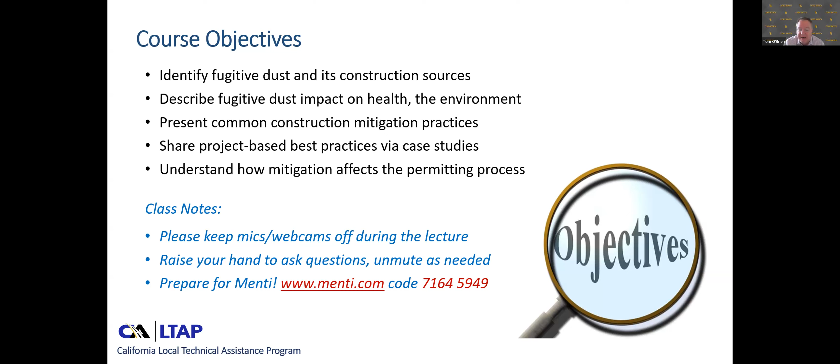But as I said, we hope to build upon this topic in the development of a certificate-based program that looks at a whole host of topics surrounding sustainable construction management and engineering practices. And Hamid Rahai, who is a professor and director of the Center for Energy and Environmental Research and Services here at Cal State Long Beach, is the designer of the program, and he's going to tell you more about how this topic fits into that in a minute.

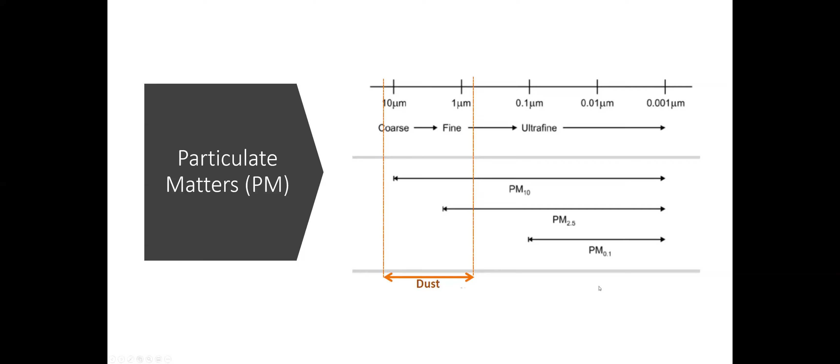Hamid, sorry to interrupt for just a second. Sure. You want to share your screen and show your presentation? My screen is not shared? That's correct. Okay, let me go back, I'm so sorry, I thought I was. Let me share my screen. I am. Can you see it now? There it go. Yes, go to presentation mode. Yeah, okay. Can you see it now? Yes, you might want to back up one, and then we can, there you go. Yeah, alright, sorry about that. I thought I had changed the slides from the old one to the new one.

Anyway, so I talk about construction phases and emissions, and these are generally the different phases of construction. As I said, you could have one or two or all of these phases in construction that include demolition, site preparation, grading, trenching, building, paving, and architectural coating.

And we have emissions associated with these construction phases. Emissions could come from the diesel equipment we're running, including off-road equipment, on-road equipment, or paving, or it could be from fugitive dust or architectural coating. So today we are focusing on fugitive dust.

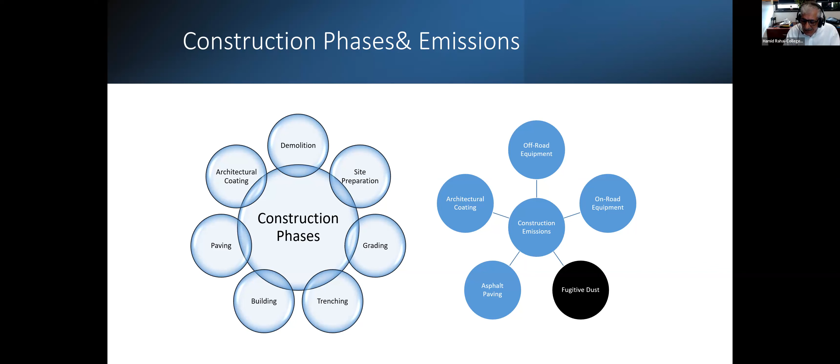So what is dust? Dust is particulate matter, airborne due to construction activities. These particulates are different from the exhaust PM coming from diesel engines. They are generally larger, estimated as 15 micron particulate, or PM15. But when we do analysis, because of the way we formulate PM based on PM10 and PM2.5, we have emission factors we use to convert the PM15 to PM10 and/or PM2.5. I'll explain this a bit more when we get to how we do calculations in construction projects, in calculating the total PM emitted into the atmosphere.

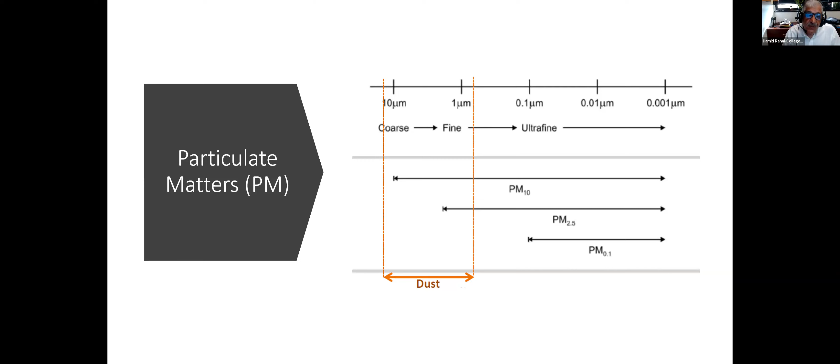Respiratory illness including COPD, asthma, and cancer is part of the health impact of dust or fugitive dust. Scarring of the lung can cause permanent damage to lung tissue and thus limit oxygen exchange, causing shortness of breath and fatigue. Swallowing dust and persistent exposure to dust could result in stomach, intestine, and esophagus cancers.

So the important thing about this part is the insistence on having all construction workers wear masks. We got used to masks during the pandemic, so it's a good thing. Mask is definitely a major way to prevent or minimize the impact of fugitive dust or particulates on human health.

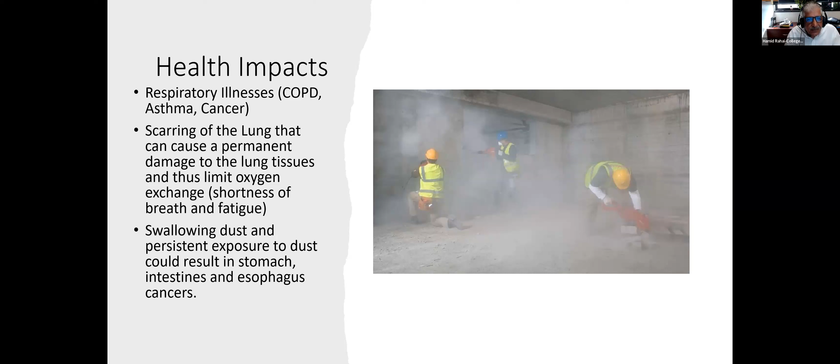So then the question is how do we calculate this fugitive dust? I mentioned that any kind of program offered by AQMD, federal, or state agencies is based on a certain baseline model that they use to calculate the total particles emitted into the atmosphere.

To do this, they look at a significant amount of data, the trend of this data, and do a statistical analysis. Based on that, they come up with formulas to do the estimate - basically looking at the trend of dust measurements and field testing from many projects, and coming up with an estimate of how much dust is emitted into the atmosphere from these operations.

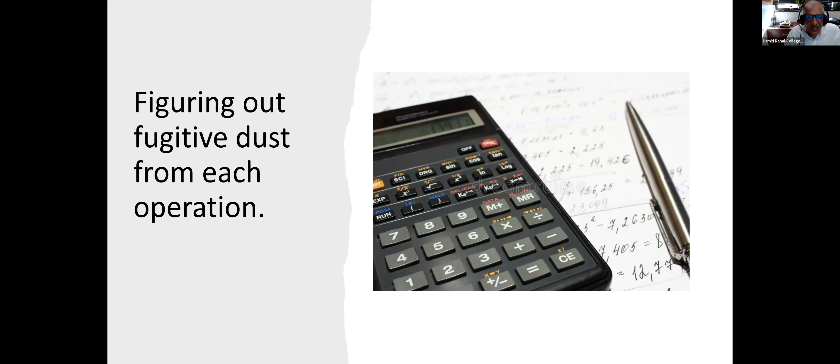When we talk about grading, if EF is the emission factor in pounds per VMT, and VMT is vehicle miles traveled, then total PM emitted is the emission factor times VMT. But the question is how do we calculate VMT for a project, and then what would be the emission factors?

For grading equipment, the equations are given here for PM15, PM10, TSP, and PM2.5. These are not complicated mathematical equations, but again we're not emphasizing mathematics here, rather emphasizing where these come from. All these correlations come from field experiments and compiling data from many different projects, coming up with an estimate of those.

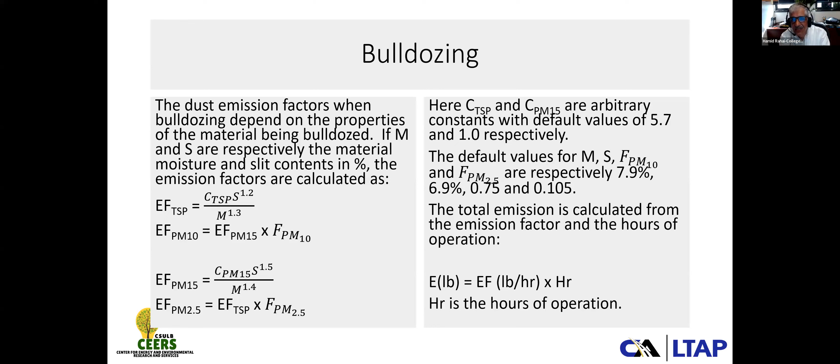Each tab related to each operation in the spreadsheet contains these values, but you have the ability to change those in case yours is different, because we do soil analysis when we do any kind of construction projects. A lot of time we do soil analysis, and when we do, some of the values could be different, so you can put in the real value to estimate those.

Truck loading and dumping and loading cause fugitive dust emission. We will talk about the mitigation process when we get to mitigation practices, but in general the emission factor depends on wind velocity and material moisture.

So you will see that one of the ways we control fugitive dust is by watering the sites. We have a sprinkler or spray water on top of the piles or areas where we're doing construction, to prevent airborne fugitive dust. So material moisture is something included in how much fugitive dust is emitted into the atmosphere.

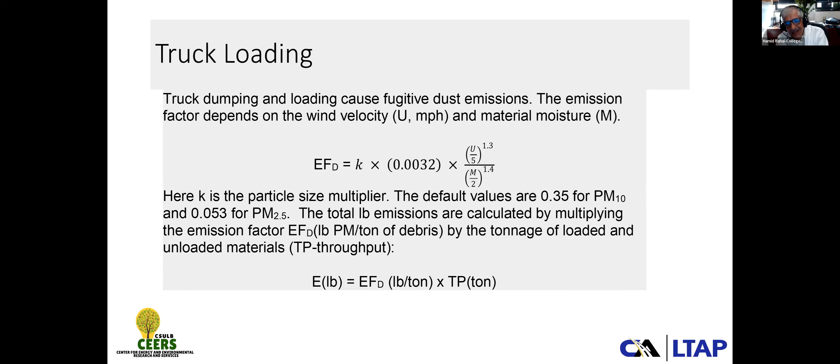Again, there is the emission factor that you need to calculate, which depends on wind velocity and material moisture. The default values for PM10 and PM2.5 are 0.35 and 0.053. But in general, we need to calculate pounds per ton of dust generated because of wind, then multiply by the total tons removed, and that gives you the amount of particulate emitted into the atmosphere.

When we talk about demolitions, there are three main operations that result in increased PM concentration: mechanical and explosive dismemberment, on-site removal of the debris, and on-site truck traffic on paved and unpaved roads. So these activities are part of demolitions.

When we talk about mechanical and explosive dismemberment, the same equation as truck loading is used, with the emission factor for PM10 about 0.0011 pound per ton of debris, and 0.00017 pound per ton of debris for PM2.5.

The input to the program for U, just remember, is in meters per second. I mentioned this also in the spreadsheet, and the M, the default value for moisture, is 2%. If there is more than 2%, then you need to change that.

So the total emissions in pounds of PM is calculated by emission factor times the tonnage of the building waste, that is the W, the tonnage of building waste. If W is unknown, there is a way to estimate that - look at the square footage of the building and multiply by 0.046 ton per square foot, and that gives you an estimate of how much waste you are removing in terms of tonnage from this building.

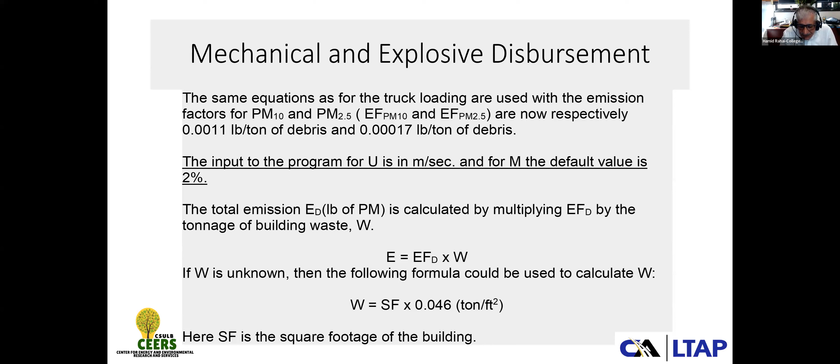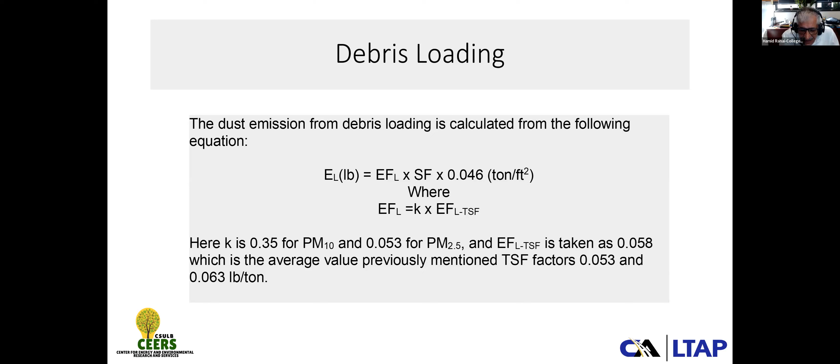Debris loading dust emission is calculated from this equation. It includes square footage, and 0.046 is a factor in tons per square footage times the emission factors, and K is a multiplier used here for PM10. If you're looking at PM2.5, these values are different. The emission factor is taken as 0.058, which is the average value previously mentioned. There are two emission factors we had before, and you take the average of that value for the debris loading here.

When we talk about on-site traffic from paved and unpaved roads, obviously fugitive dust is associated with these activities. For paved road on the left-hand side, you can see the equations. This is a little bit more complicated, but it depends on the number of wet days that we have at least 0.01 inch precipitation.

N is the number of days, so if you're looking at the total particulate in a month of activity, the number of days is 30. If you're looking at annual, it's 365. If you're looking at seasonal, it's 91 days. And W is the average weight of the vehicle, generally taken as 2.4 tons.

It could be different if you're using different kinds of vehicles, so that can be changed in the spreadsheet to do the right calculations. Generally, the K factor is a particle size multiplier. SL is road surface silt loading, so you can calculate when we have a paved road how much PM is emitted. For unpaved road, the equation changes and includes mean speed of the vehicle and material moisture content. It's saying material silt content in terms of percentage. VMT, vehicle miles traveled, is included here. Inputting these values into these equations for unpaved road gives you the emission factor. Once you have the emission factor, you can multiply that by VMT.

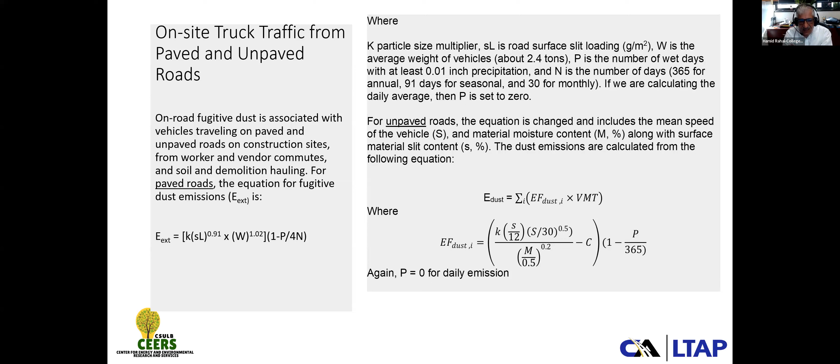I have a summation here that includes multiple activities. Depending on the site, if it has variations in terms of the material and moisture and so on, and different vehicles in different areas, you need to calculate them individually and then add them up to get total PM emitted into the atmosphere. So that is generally an overview of the PM generated.

I would like to bring up the spreadsheet, but before I do, I want to know if there's any question. Anybody has any question? No? Okay, so let's get going.

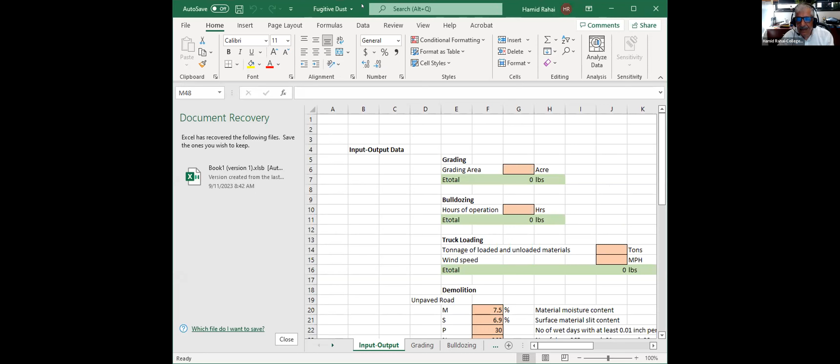So here I have input-output data that you can see, where you can put acreage - all these brownish cells are the input-output data that you can put in. For grading, you need to put in acreage. For bulldozing, you input the hours of operations. For truck loading, we look at the tons and miles per hour of the wind speed. Then for unpaved roads for demolitions, I populate this with the default values for the annual, and the number of wet days would be 30 wet days.

You can see that, and the default value for the material moisture content is 7.5%, and surface material silt content is 6.9%. For paved road, again the same default value, and the weight of the vehicle is generally 2.5 tons or 2.2 tons, whatever it is that you're using.

I did not talk about architectural coating here because architectural coating is related to VOC, volatile organic compounds emitted from the painting and how we prepare the surfaces. That is not covered here because that's related to another module.

I have a question for you - could you explain bulldozing versus demolition? Obviously you see them as two different concepts. Generally, bulldozing is compiling the demolition materials. The way it's categorized in federal and state agencies is that bulldozing is compiling, not demolishing things. When we talk about demolishing, we're talking about having a building we want to demolish, and we use cranes and other equipment to hit the buildings, different ways of demolishing. But bulldozing is for compiling - compiling blocks, aggregates, and materials on site. Exactly. Thank you, thank you.

Any other questions?

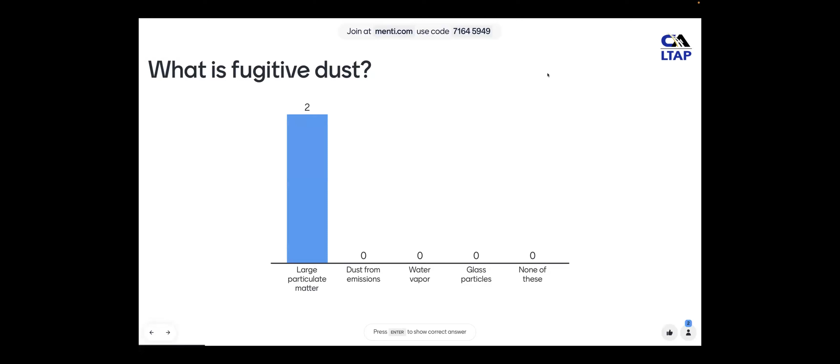Here's the first question: what is fugitive dust? Large particulate matter, dust from emissions, water vapor, glass particles, or none of these? We have two bold respondents. Go to menti.com, code 716-45949, then you can join us on this.

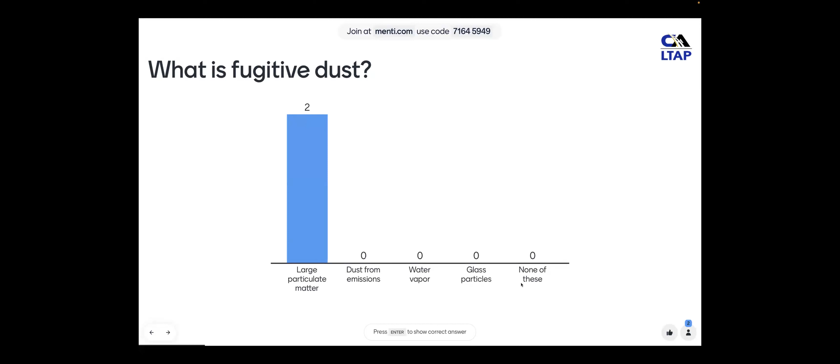Okay, let's see. That is absolutely correct.

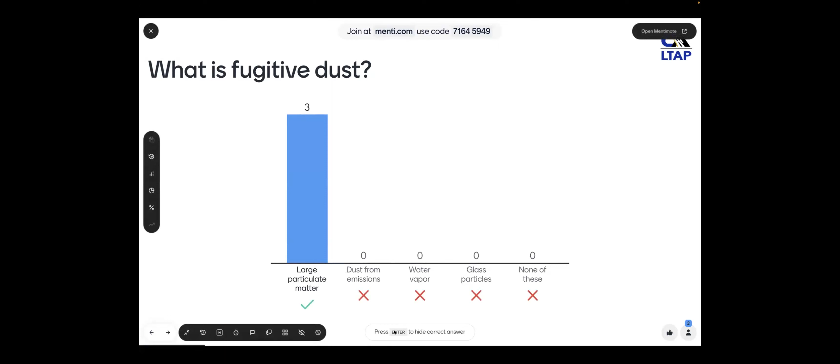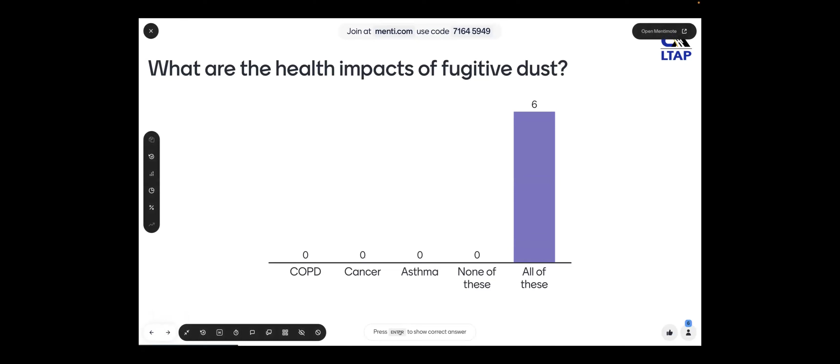Next question: what are the health impacts of fugitive dust? Would you say COPD, cancer, asthma, none of these, or all of these? Okay, it looks like there's a little bit of consensus building. Let's see if that's correct. And that is correct. Excellent.

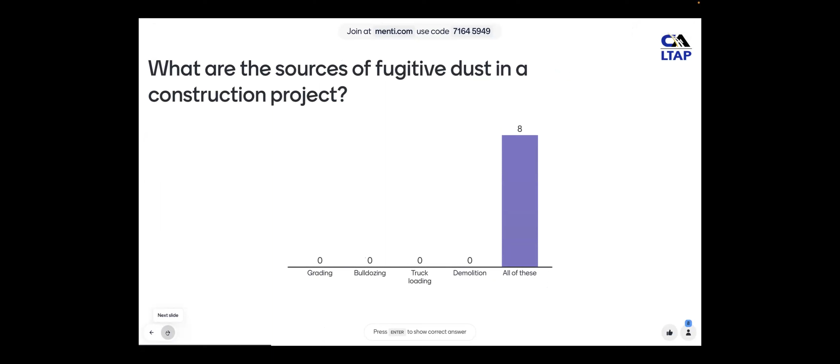What are the sources of fugitive dust in a construction project? Would that be from grading or bulldozing, maybe truck loading or demolition, or possibly all of these? You'll be pleased to know there are no math-related questions here. Okay, excellent. Got a solid 10 out of 10 on that one.

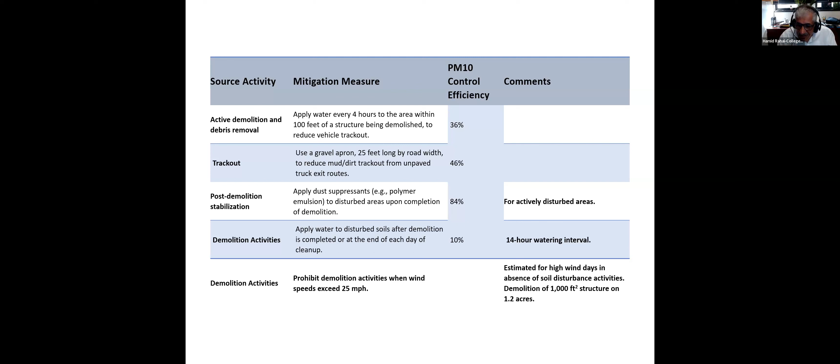For construction activities, you apply water every 3 hours to the disturbed area within the construction site. The control efficiency is 61%. Generally the interval for watering is about 3 hours, a little bit more. You want to make sure you have moisture on the site to prevent any airborne particulates.

Scraper loading and unloading requires a minimum soil moisture of 12% for earth moving, using a movable sprinkler system or a water truck. There's a huge construction site near my house where every time I pass by, I see a truck sprinkling water because they do a lot of earth moving and soil removal. Moisture content can be verified by lab sample or moisture probe, based on the AP42 documents. The emission factor equation for material is used to increase soil moisture from 1.4% to 12%. Efficiency for controlling PM is 69%.

Construction traffic: limit on-site vehicle speed. As I mentioned, the speed of vehicles significantly affects how much PM is emitted into the atmosphere. Limiting site vehicle speed to 15 miles per hour or less generally controls this, with an efficiency of 57%. The way they came up with this is by assuming a linear relationship between PM10 emission and uncontrolled vehicle speed of 35 miles per hour.

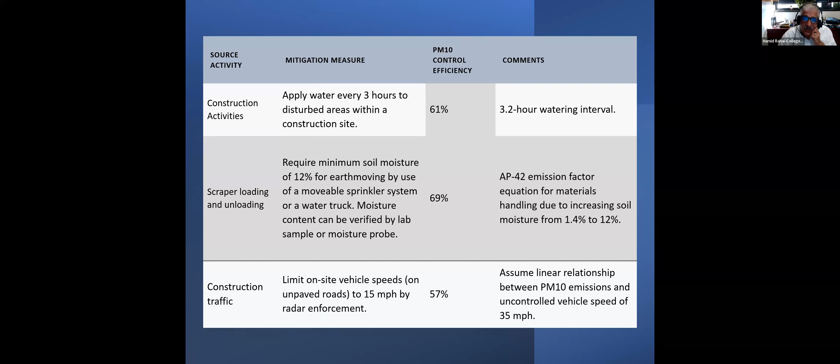The comments give you some idea of how to apply these methods and where these numbers come from, giving you an idea of what kind of efficiency you get when you apply different methods of dust control.

Conveyors: a lot of the time we use conveyors to transport material. You continuously apply water spray at the conveyor transfer point, giving 62% efficiency.

Storage piles: a lot of the time we have enclosures for a storage pile. It's a three-sided enclosure, with the open side further away from construction or any exposure that may disturb the storage pile. Generally the other sides have about 50% porosity. It's very efficient in controlling dust into the atmosphere, with 75% efficiency.

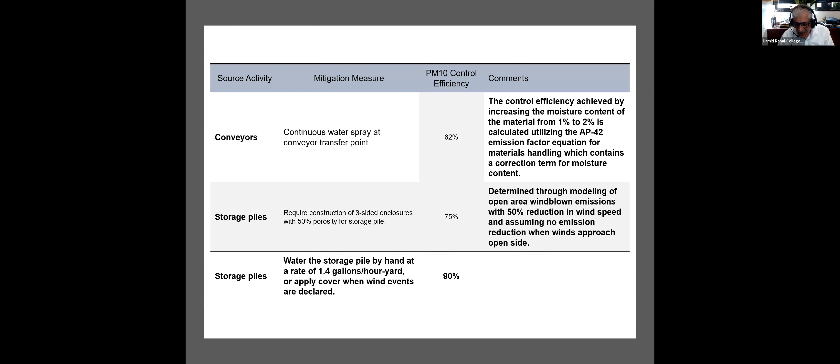Water the storage pile by hand at a rate of 1.4 gallons per hour per yard, or apply a cover when wind events are declared. If you do this, efficiency goes up to 90%. A lot of the time you see storage piles covered, especially if they sit there a while until trucked out or used for other purposes. You need to continuously be aware of this. I've seen that sometimes some storage piles are covered and some are not, because continuously maintaining a cover is a difficult task, especially in windy areas.

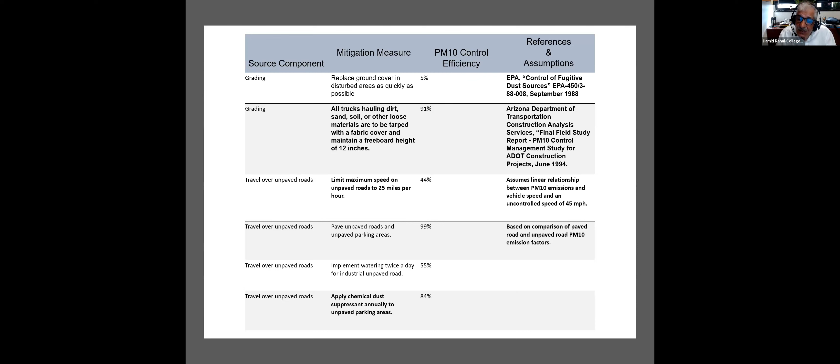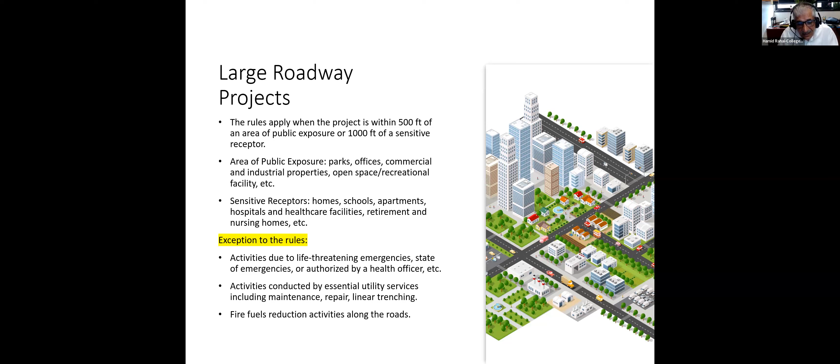So you know that when we have large projects, these rules that we talk about apply to that. Exceptions to the rules: when we have a life-threatening emergency, a state of emergency, or the activity is authorized by a health officer, these are exceptions. Activities conducted by essential utility services to maintain our utilities, including repair, linear trenching, and other things, are exceptions. Fire fuel reduction—you've seen firefighters perform fire fuel reduction activities along roads, burning brushes and so on—these are also exceptions to the rules.

So what are the rules? Dust from construction: first of all, for large projects, each site should have a dust control supervisor who has completed the South Coast AQMD Fugitive Dust Control class with a valid certificate, in addition to all the rules and regulations. We need to restrict vehicle speed to 15 miles per hour for all unpaved roads used for any construction vehicle traffic, and implement one or more of the following control measures as needed.

Water all unpaved roads within the project perimeter used for construction vehicle traffic at least once per every 2 hours of active operation, or 3 times per normal 8-hour workday. As I mentioned before, you've seen that we generally water every 3 hours—that seems to work. Or we apply a chemical stabilizer to all unpaved road surfaces in sufficient quantity and frequency to maintain a stabilized surface.

Material piles, as I mentioned, generally should be covered. They should not be more than 30 feet in height, and we apply dust suppressant as necessary to maintain a stabilized surface and prevent visible emissions from extending further than 100 feet as measured from the nearest edge or perimeter of the material pile.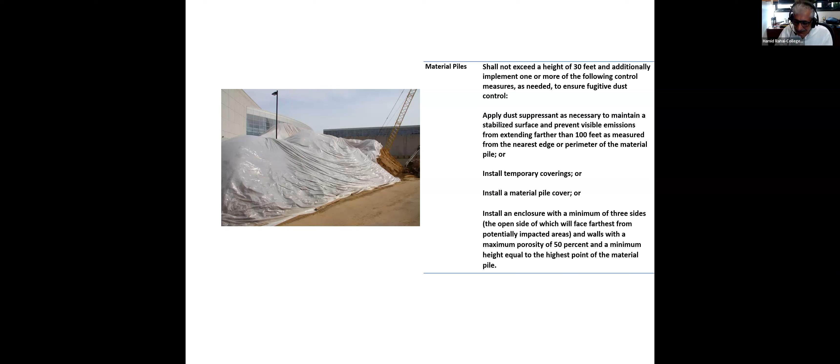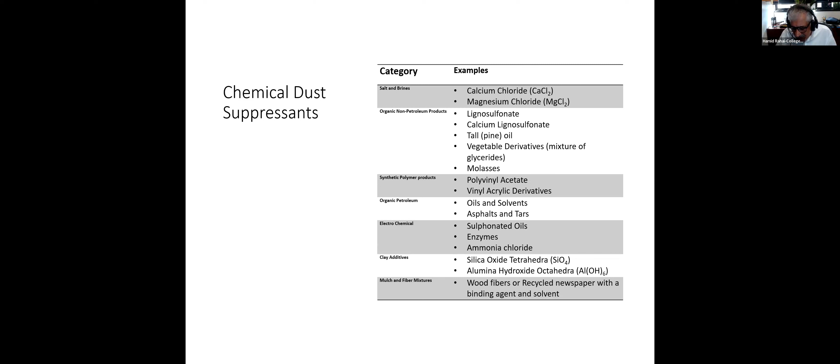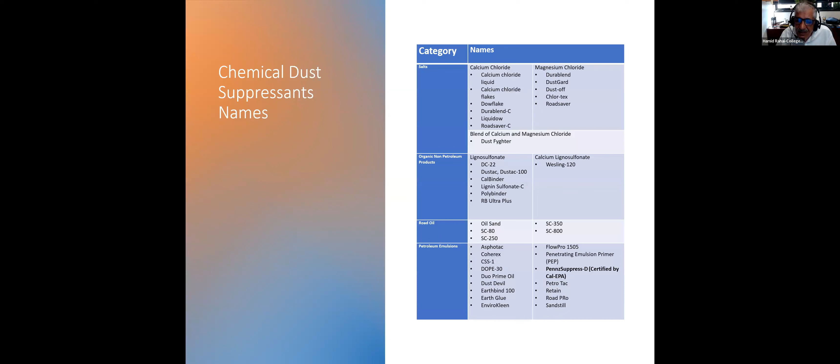Here are some of the approved chemical dust suppressants. As I mentioned, it depends on what type and so on. My colleague Ken will talk about the types used in industry, but it depends on the type of construction and the type of activity you have. You could select one of these chemical dust suppressants to apply. These include salts, organic non-petroleum products, road oil, petroleum emulsions, polymer emulsion, electrochemical, and mulch and fiber mixtures. There are also some unclassified ones, which you can see in the list here.

But as I mentioned, the cheapest and most used suppressant has been water, for controlling airborne particulates.

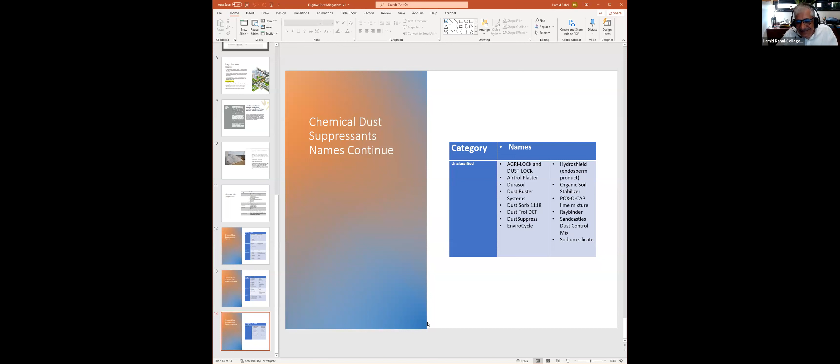So with that said, I want to stop and see if anybody has any question. Yes, any question? No, no question. Looks all clear, Hamid. Okay, so let me stop sharing.

And you want to take a break, or do you want to do the Menti? How do you want to do this? Yeah, I think at this point we're running a bit early. But if everybody would like to take a short break, we could be back at, let's say, 10:25.

Okay, are you guys seeing my first slide with my beautiful face on the front there? Absolutely, perfect, yes, very beautiful. Oh beautiful, yeah that's me man. That's probably 10 years ago, so I'm kind of ghosting you guys a little bit, sorry about that. Ken is still the same, I don't see any change.

All right, so hey, I'm Ken Taylor. I'm a design manager at Griffith Company. Griffith Company has been around since 1902. Most of our work, the majority of our work, has been in Southern California. I've been at Griffith now for about 14 months, and I have a background in design for transportation, transit, and city development type work. I was a plan checker with David Karam for a while, who you'll hear from later.

It's an honor to be here today to let you know how we deal with fugitive dust mitigation and our best practices. Like I said, I'm a designer and I have some experience out in the field. I have some really good pictures and some good projects to present to you.

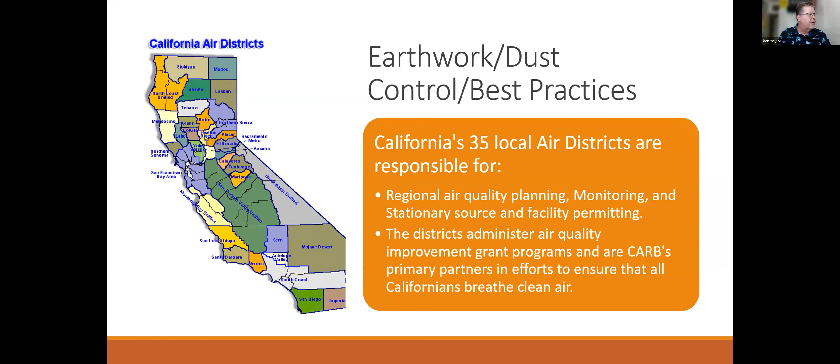Next slide. So I was going to review some of the AQMD handbook requirements, and I took some of this information from Hamid's slides that he had previously provided.

We have to apply non-toxic chemical soil stabilizers—Hamid had a really good list, much more than I am aware of—but those stabilizers help us save a lot of water, which is a sustainable element for us. We will replace ground cover where we can. I have a project along Norco Bluffs where we had to remove a lot of Arundo, and we're not putting the Arundo back, but we are stabilizing the slopes and putting in pavement and a parkway, so there will be some landscaping put back along our project there.

Enclose, cover, water twice daily, or apply non-toxic soil binders to exposed stockpiles. We do have that situation—we stockpile material for haul-off days. We also have a materials yard where we crush materials and store materials that get hauled off and put into other projects, and those areas do get watered down.

We have to water our active sites at least twice daily and as necessary, depending on whether it's windy, dry, or hot conditions. Hamid was right—we don't want to overwater even our debris piles and things like that because it increases the weight. But it's important that we monitor those and keep the weight down, because that just increases haul-off and dump charges and things of that nature.

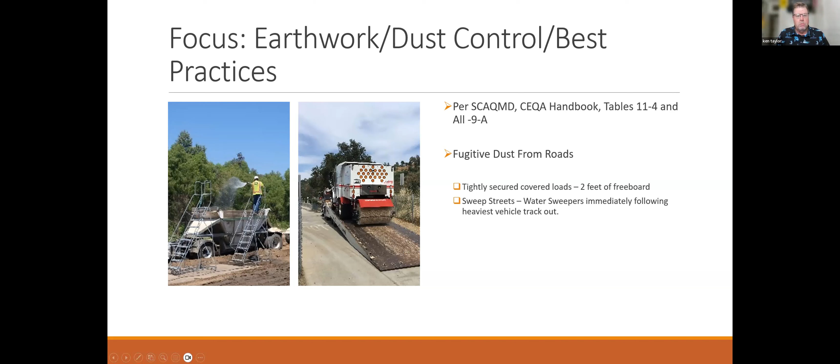These are a couple of really cool pictures too. We set up a truck washing area on a paved access road—that's an AQMD requirement. We did it on site for Devil's Gate, before the trucks even exited the site. This picture on the bottom is before it got put into operation. Basically the trucks pull in here, and if you look at the slide on top, there are all these spray nozzles that wash all the tires off, which helps minimize tracking out into the local streets. This is after they get watered down on top—you can see the dirt might not be quite 2 feet lower, but it should be. That's the 2 feet of freeboard—maybe a foot of freeboard right there, honestly.

Like Hamid was saying, we paved construction roads depending on truck volume, and we had a lot of trucks, more than 50 daily trucks out of Devil's Gate. So we paved out to the paved roads, and we had jiggle strips and things like that that knocked the dust and stuff off of the trucks as well.

We're applying water 3 times daily, probably actually more than that depending on the job site.

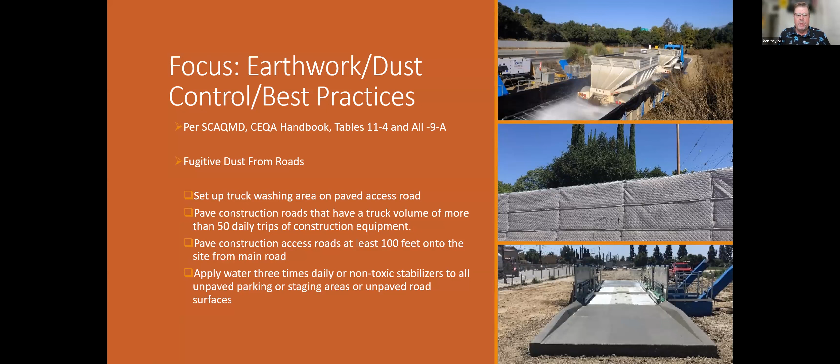And then the non-toxic stabilizers for unpaved areas, we like to use that as long as we can steer clear of it for a while too. We use the stabilizers to basically keep dust from coming off that site, as long as we can stay off it, because if we disturb it, there's potential for the dust to come off and we have to reapply those stabilizers. But it does help us reduce our water usage as well.

Some of the local permitting for this project - these are pictures of some of our Rain for Rent tanks, cleaning up the effluent, the water that's actually passing through Cogswell Dam.

This project is a huge project for LA County where we're doing more sediment removal, and we're in our 4th year of the contract.

We can only work during the dry season, we can't work during the rainy season. So in the rainy seasons, we have SWPPPs and stuff like that we have to put up by our yard that's outside the dam, the reservoir, I should say.

And then the water quality management plans - this is part of a SWPPP requirement too, where we're treating the water before we outlet it past the dam tower. And I have a couple good pictures for that too.

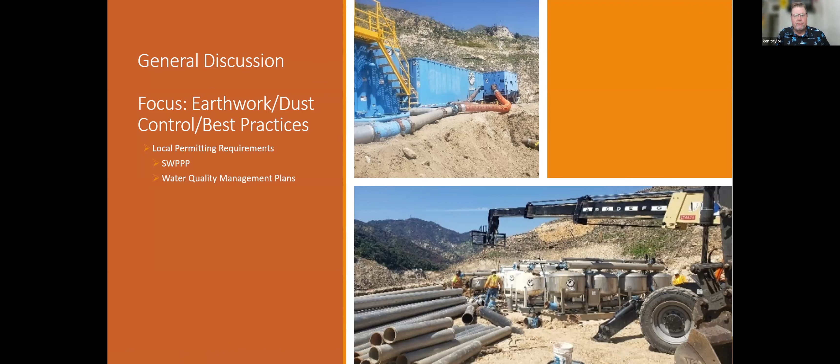So, time of year and the duration of the project. This is that Devil's Gate project, which we did during the dry season with all the trucks. This project is the Cogswell Dam, a reservoir for LA County.

This has millions of cubic yards of siltation built up and debris from the fires that were in the mountains back there behind Pasadena and Azusa. We've had a contract with them, going on our 4th year now, where we're removing the silt and debris out of this dam.

You can see where the water line is up here. We basically drain the reservoir, and there's water that's constantly coming in, so we're dealing with that, and that's what those treatment devices were for before we let it go outside the dam. But this has been a very good project for us - it's helping the county with removing the silt from the reservoir so they increase their capacity.

And there was a valve associated with this inlet-outlet tower, and the valve, I heard, was about 80 feet below this surface here, and they had to replace it. So we dug all that out, and we were able to get in there, and I think they're getting ready to replace that valve.

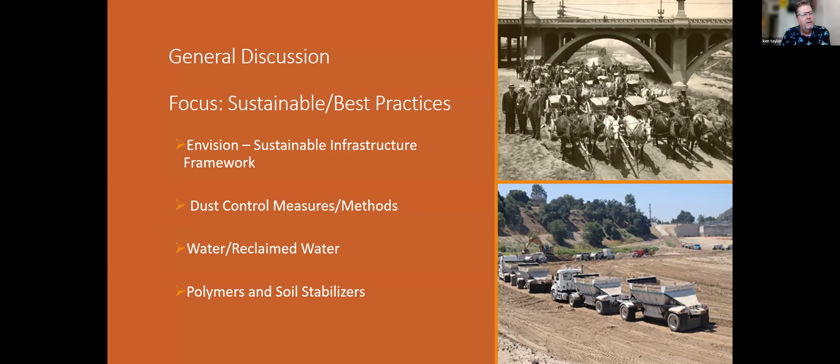We'll talk about some more dust control methods, water and reclaimed water, and then polymers and stabilizers that we utilize too - so a little bit of a repeat for what Hamid had.

As far as the Envision approach, there's a category, 1.3, for reduce air pollutant emissions. The intent is to reduce emissions of air pollutants, particulate matter including dust, ground level ozone, carbon monoxide, sulfur oxides, nitrogen oxides, lead, and volatile organic compounds.

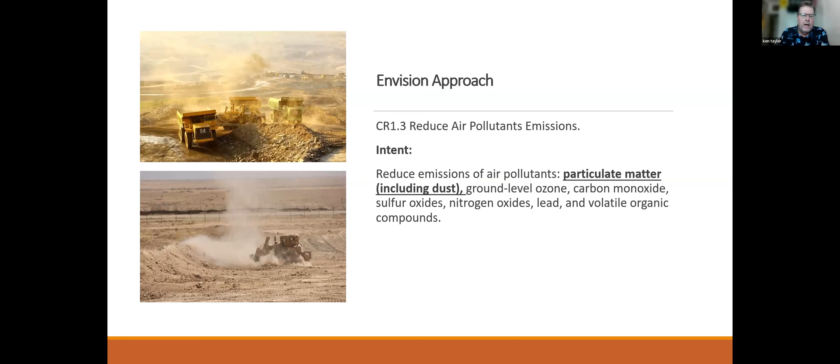So during the Envision process, for that criteria of reducing air pollutants and emissions, the metric is reduction of air pollutants compared to the baseline in that area. The credit is applicable to all projects that directly produce any of the criteria pollutants, and projects that do not produce air pollutant emissions because of design or intentional planning decisions to choose non-polluting alternatives may apply for the conserving level, which is a really good level within the Envision process, with the supporting documentation, of course.

So you'd have the reports and maybe even the calculator that Hamid came up with.

That thing would prove pretty well how you're reducing pollutant emissions, so that's a really cool item. Hamid, I apologize because I haven't had a chance to look at that spreadsheet all that closely yet, but I did distribute it to our grading folks to take a look at it. If I get feedback, I'll definitely provide that to you.

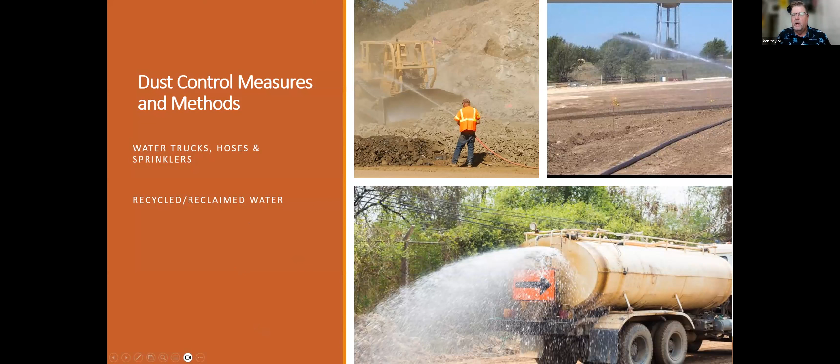One of the things brought up by one of our foremen was, in desert areas, especially with the drought we've been experiencing, there's a perception around using water to water down construction sites - that we're kind of wasting water. But if we can use reclaimed water, which is a little bit cheaper too, that helps the whole process, and it's not a waste. It's actually a really good reuse of water from a sustainability standpoint.

Soil stabilizers in lieu of water - we put those on finished slopes, on roads that may be undisturbed for a while, or pads. We also use soil stabilizers on haul routes, because we can keep those things intact. There's still water required, but less. Soil stabilizers help us a lot on haul roads.

Dust control strategies for large projects. We've got a project, or potential project, in the high desert - 1,600 acres, 30 million cubic yards of dirt that we're moving. It's going to take us 2 years to do it. It's big, and we've got mass haul diagrams and phasing that we've been working through, which is required when you're dealing with that amount of dirt.

You just can't have everybody going willy-nilly all over the place. You've got to concentrate that effort in phases so you can have a succession of work, whether you've got to get to finished grade, start doing utilities, or whatever else needs to go in that particular area. If you can get the finished grade, stabilize it, and move the earth moving equipment along, that's very important for the efficiency of the project.

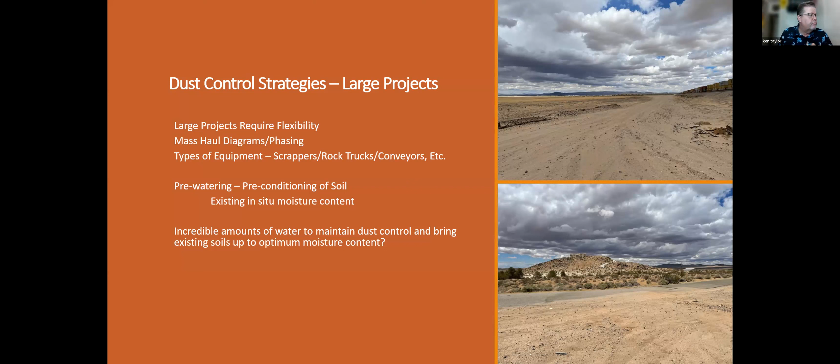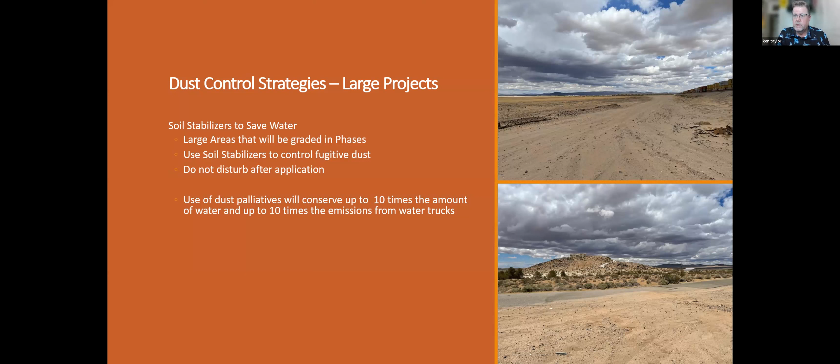We've done a few studies for this larger project, and we've made statements along the lines that we could conserve up to 10 times the amount of water, and up to 10 times the emissions from water trucks, because we don't have to use water trucks to water the area with the soil stabilizers out there. So there's a lot of sustainability benefits from that as well.

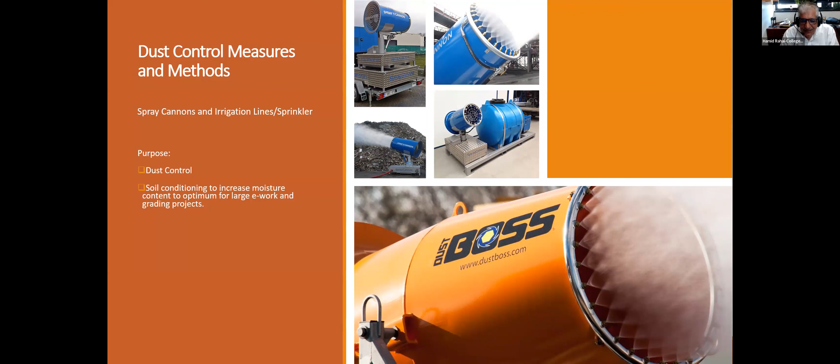Well, thank you so much, Ken. I appreciate it. Thank you very much. Thanks for this opportunity. I appreciate that very much.

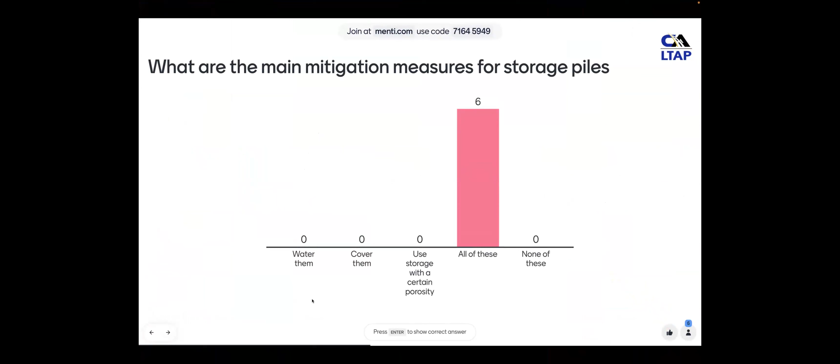That does appear to be the correct question. Excellent, excellent, 100%.

For large roadway projects, rules apply when the area of public exposure is within how many feet of the project? Is that 100, 200, 400, 500, or who cares?

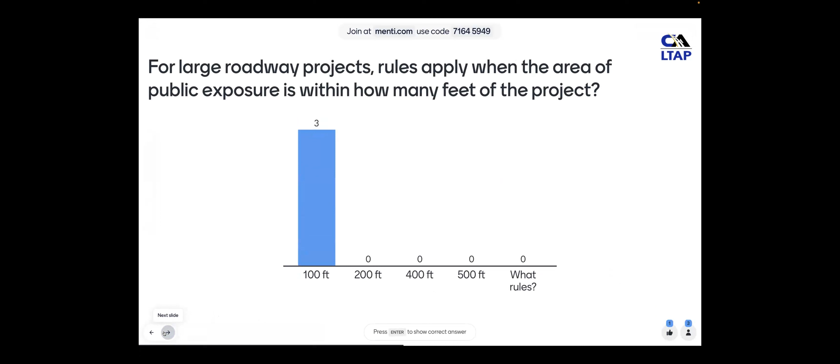Okay, 100 feet looks like the desired distance. It is 500 feet. Hamid says 500 feet. Yep.

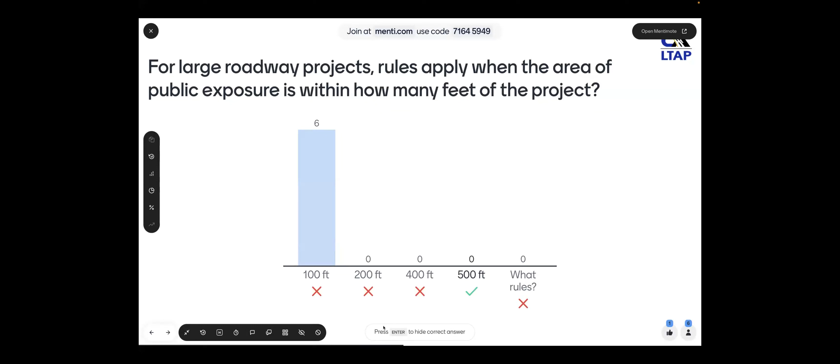Similarly, what rules apply when an area of sensitive receptors is within how many feet of the project area? 100, 500, 1,000, 2,000 feet, or even further out?

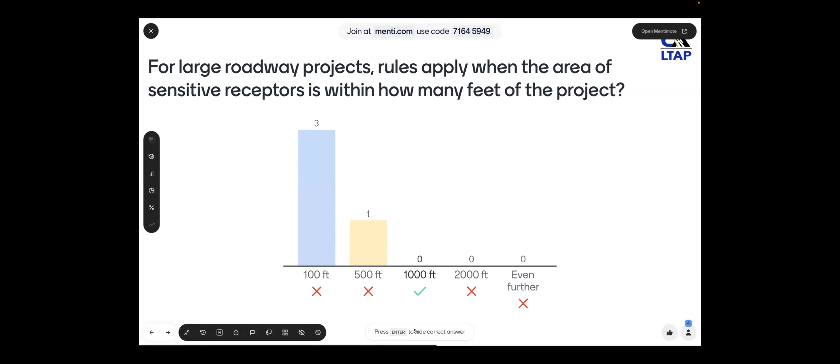For large roadway projects, rules apply when the area of sensitive receptors is within how many feet of the project? It is 1,000 feet. Did you want to reiterate any of that, Hamid?

Well, yeah, these two distances are very sensitive because they impact the populations, especially the sensitive receptors we talk about - residential, health clinics, and so on. So we have to be very careful about these areas. And the 1,000 feet, is that an AQMD regulation? Yeah. Thanks.

Last question, I think. What is the maximum allowable height of material piles? Can they go 10 feet high, 20 feet high, 30 feet high, or all the way up to 100 feet?

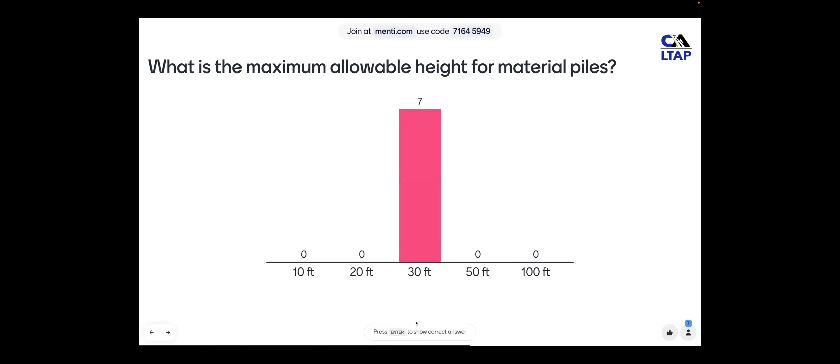All right, there's a lot of consensus around 30 feet. That does appear to be correct. 100%, excellent.

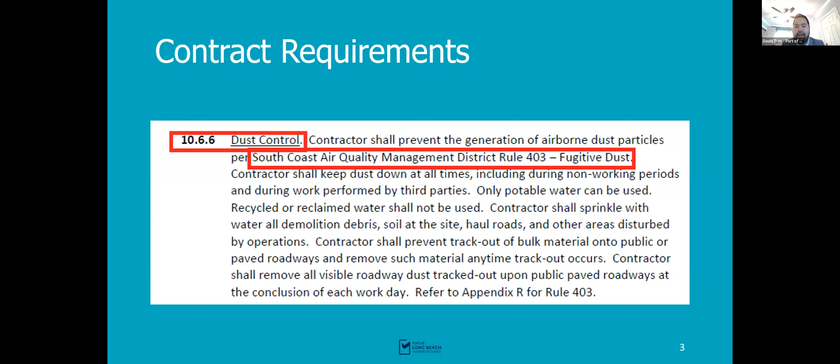So just going over this, this is contract requirements. This cutout right here, excerpt, is really our typical construction contract requirement related to dust control, and it refers to the South Coast Air Quality Management District Rule 403.

This is usually found in our general conditions, as you can see here. And what is Rule 403? Just like the purpose of it, this is straight from the manual itself. Rule 403 is just there to ensure that dust mitigation and control are implemented, and for the contractor to be proactive about it. Typically, the dust mitigation measures and work plan would be included, and that would be a construction submittal submitted to us as part of the environmental protection plan, so then we can review it and have one of our environmental specialists look at it as well.

So there's really two categories: one is defined as just a typical operation, and another that's defined as a large operation. If it's not a large operation, the general requirements are that, one, dust emissions should not exceed 20% opacity and maintain good visibility, and two, the track out be less than 25 feet from the operational activity. That's really just a summary of what's defined as not a large operation.

But if it is a large operation, what happens there? So this is a form, and I pulled out the specific project with Griffith since Ken is in the audience. If it's a large operation, it's typically defined as more than 50 - the disturbed area exceeding 50 or more acres, or any earth moving operation with a daily earth moving volume of 5,000 cubic yards, or 15,000 cubic yards within a year time frame.

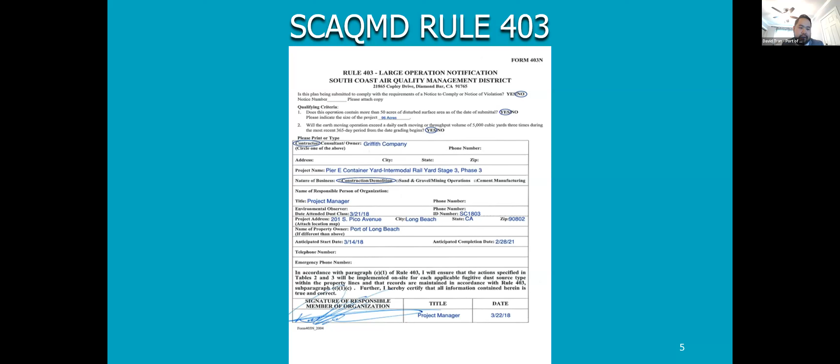Typically this is part of the package as well. So one of it is the form, and then there's a little bit of backup that would need to be done too. So this is another kind of demonstration of what is the project area, and this needs to be included with the form as well, the form 403N.

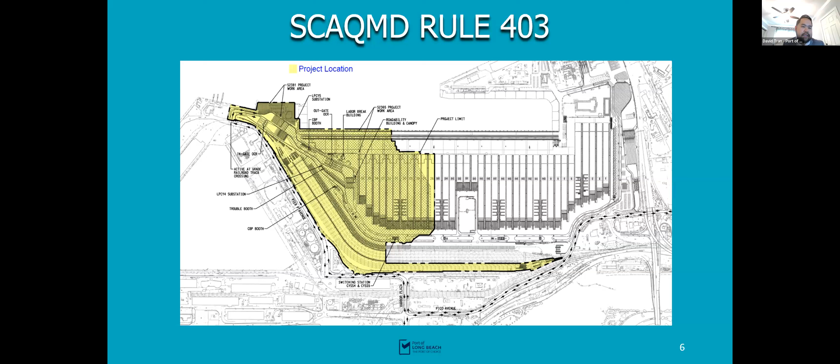And in it too, they have to include the responsible person to maintain and implement dust control and any mitigation measures, as well as maintain the daily record of dust control activities and any other associated activities with it. Typically the responsible person is the project manager, the superintendent, or the project engineer - that's typically what I have seen on my jobs.

And with that, I want to turn it over to Austin, and then he'll go over some of the mitigation measures that we do.

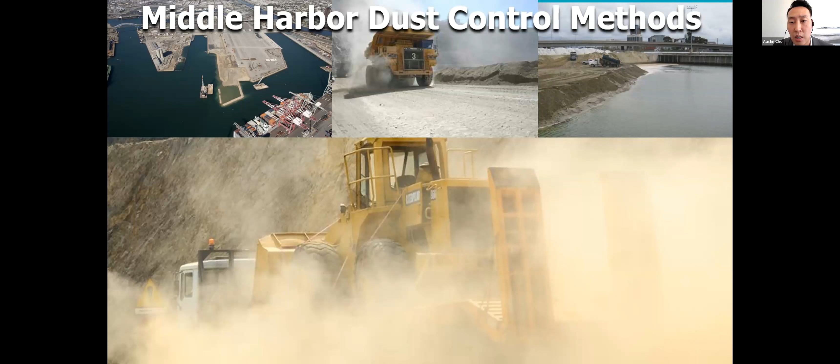Okay, so obviously kind of 101 again, back to what is the best way, or best BMP really, to control dust and airborne dust: it's really just to create that physical barrier. Prevention is always better than mitigation. So as per our contract requirements, we require that all material stockpiles be covered. Typically, like Ken would go over, we would be using Visqueen 10 mil plastic sheeting. We would see that.

I bring up on the owner's side, change orders and stuff is a huge thing as part of the owner's requirements and whatnot.

At Middle Harbor, like I mentioned, we had a bunch of different contracts working together. We had overlapping contractors, Griffith being one of them, working in their own areas and overlapping with each other.

So stockpile management was a huge undertaking. It was difficult to do, especially with situations where we had conflicting project boundaries. That ended up resulting in a change order of material that we required one of our contractors to excavate. So everything in terms of stockpile management with that extra material becomes a change order.

It becomes extra cost. So on the owner side, what we really wanted to do was, once the stockpiles were developed, push the contractor to do whatever they could to expedite getting these stockpiles offsite, whether it was surplus soil hauled to a waste facility, something we as the port could maintain in one of our offsite facilities, or for reuse purposes within backfill. But the main kicker is, as long as these stockpiles are on site, all the effort, cost and time it takes for contractors to maintain them is a huge undertaking.

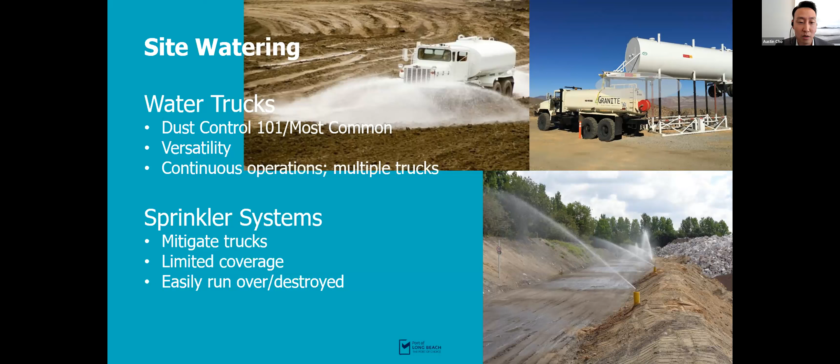Ken mentioned this already too - soil stabilizers. I did want to mention one aspect, going into the bottom right picture first: surcharge material. For those that don't know what surcharge really is.

When it comes to waterborne construction, surcharge is a consolidation method. For us, if you can imagine, we're trying to literally build land in the water, so you have to worry about consolidation. If you were to just stick dirt inside water and wait for it to fully consolidate, you're talking dozens, in the 30 some plus years of time.

So you really have to implement a consolidation method, which included surcharging the material and also wicking the material. When you say wicking and wick drains, think of it like a candle wick.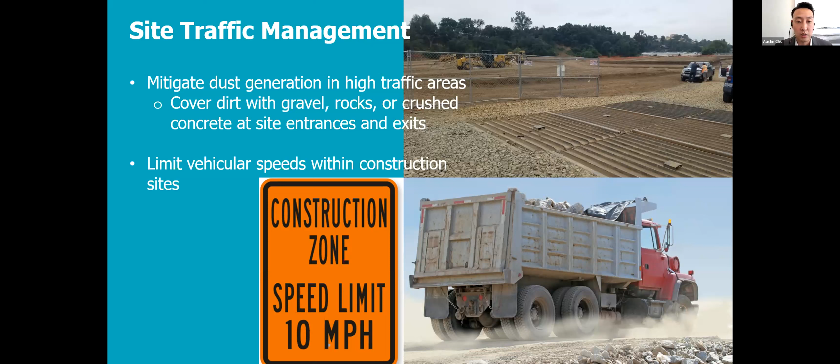All right, next slide please. So that was for Middle Harbor. This next one is the Gerald Desmond Bridge demolition. For those of you from Long Beach, this is very close to your heart - what you see every day is the new Long Beach International Gateway Bridge, I think is the formal name of the new bridge put in for the Port of Long Beach.

Really, where the issues came up - and we'll see some pictures that are worth a million words - is when we were doing the work to take down some of these piers and columns, we had neighboring tenants complaining about the amount of dust and concrete they were having to breathe in. A lot of these longshoremen, who have very critical jobs, were now having to work within fugitive dust areas, and they weren't happy about it. So it was an issue that came up very early in the project.

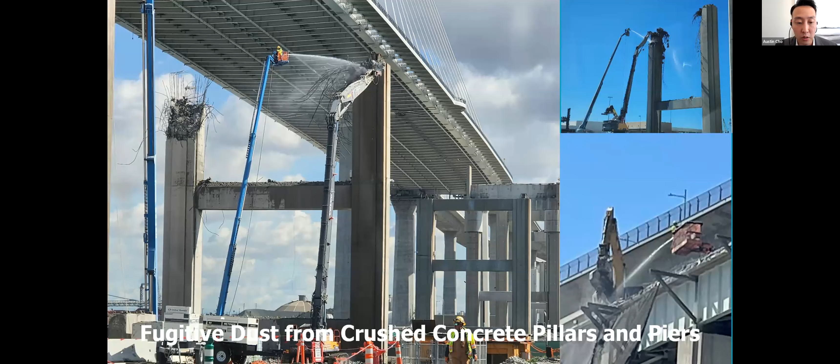Next slide, please. So David and Ken were talking about these misters, or these cannons, this hydro cannon. You can kind of see in this picture that they were implemented here on this demo project. On the very bottom left corner, you can see where that hydro cannon is spraying mist out there while the work is being performed. And I think you can also see one in the middle picture on the right, where you see a hydro cannon just facing up towards the bridge as it's coming down.

But yeah, I think the big picture here was for fugitive dust and concrete, we employed so many different methods. It was a ground coverage method, it was even people with hoses on the ground level, but it was also more innovative techniques such as using cranes and directly watering at the source of the construction, and also mister units. I don't know the exact number, but I'm hearing numbers in the range of a couple million gallons of water that was used for this 2-year project to take this bridge down.

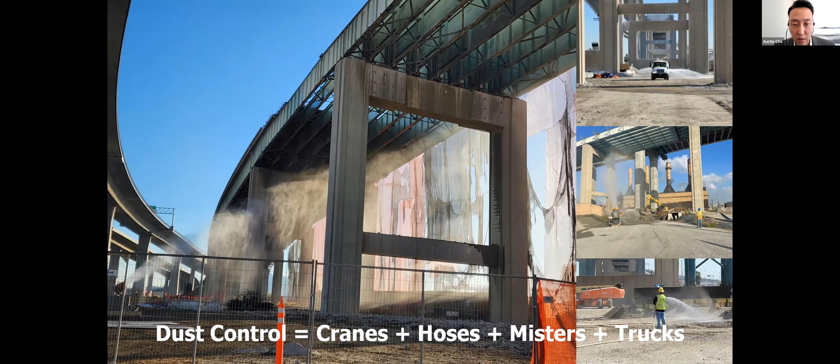All right, so I think that might be it, David. I don't know if there's another slide. Yeah, I think that's it, folks. So thanks so much for your time, and we welcome any questions.

Thank you so much, Austin and David. Great presentation, great examples of also the type of innovation that we have to do to control the dust. Any questions?

One question I have, Austin, is did you use ocean water to be able to control this? I mean, no, I don't think it was. I think it was regular water. That would be pretty cool. Yeah, I don't think it was.

Okay, any other questions? I have a quick question for Austin. In building out the terminal, and I forget what you called it, it was surge or surface, or what was the new material that you had put to surcharge? Surcharge, yes. In building up that surcharge, is that dredged in from around the area from the water as part of making the channels deeper for the bigger boats, the bigger container ships, or do you ship that or truck that in?

It is a great question, Scott. It was actually a combination of both a lot of times, and it just depended on the area. We would have a lot of dredged material because it kind of worked out, right? Because we had to make the channel deeper for these larger vessels. So we would have to, whether it was clamshell, literally just scooping up material, or it was hydraulic dredging, which was piped in from the ocean.

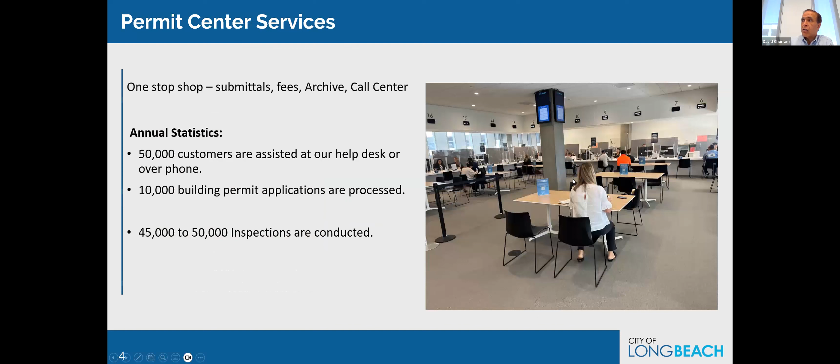Most of you may recall when Schwarzenegger was governor of California, he wanted to come up with the California Green Building Code. By the end of his term, this new code came about, now called Cal Green or California Green Building Code. Some of the regulations related to resiliency, construction material salvage, recycling, fugitive dust, waste management, topsoil protection, and landscape design are enforceable and part of cities and local jurisdictions' regulations, detailed and spelled out in the California Green Building Code, which was referred to through the presentation by Dr. Rahai today.

On the inspection side, we do a substantial amount of inspection, but our inspections include demolition permits, grading permits, bond release, and grading and site dust control inspections.

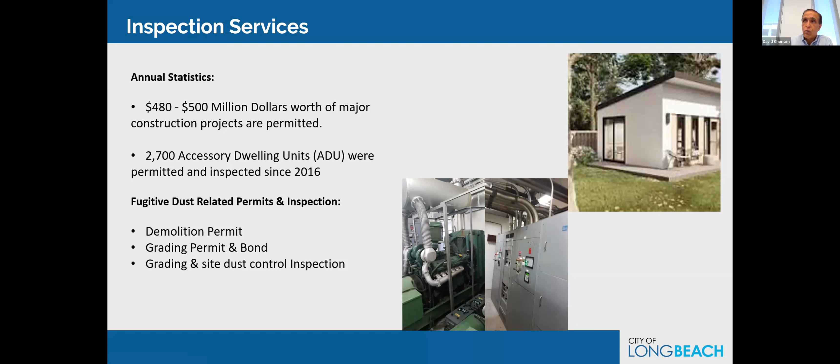There's a huge trend right now on building small residential dwelling units. I was just looking at some statistics this week. We have issued 2,700 ADU permits since 2016, since the law came about. When you divide 2,700 by 5 years, you see there's a lot of residential construction and grading work right next to adjacent neighbors and homeowners.

Going back to give you some sample projects that we had to deal with since 2016, 2017 - City of Long Beach has had several city halls, but it was determined that our previous city hall was not seismically feasible, was too expensive to seismically upgrade, and there were a lot of mechanical issues. So the building that was built in 1972 had to be demolished.

So the pictures that you see happened right downtown Long Beach. Some of you who have lived in or come to Long Beach remember the 14-story tall City Hall that was demolished under huge scrutiny, under a very large set of eyes watching this project, because it was right downtown, exposing apartment owners and commercial buildings that were overlooking the site. So when the demo came in, there was a conversation about potential implosion of the building, because obviously contractors want to get this done quick.

But because of the AQMD rules that we just mentioned, implosion of the building was not feasible. So this building was dismantled piece by piece - a time-consuming, very expensive procedure, but done very right.

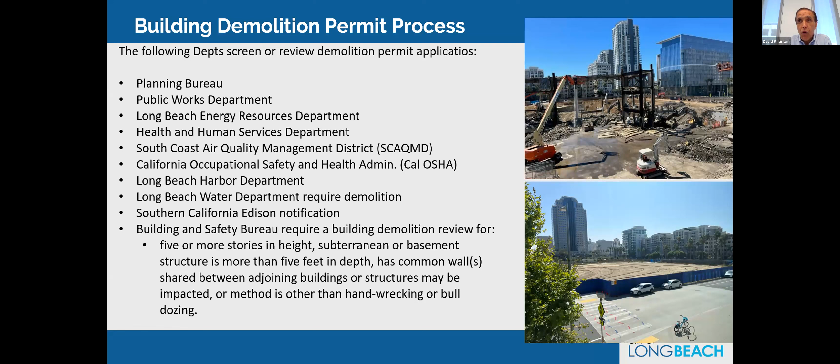Sometimes, as I mentioned earlier, where it's allowed, agencies may allow implosion of the building. But all in all this results in a lot of dust, fugitive dust that needs to be mitigated and controlled.

Here is another example of a project we were involved in, my staff were involved, a major grading project, a city project. We were there from the standpoint of air quality management. It was managed under a public works contract, but anytime a project construction goes through public works, Building and Safety in Long Beach is the plan reviewer for those projects. So we have to make sure all those agencies I mentioned before have signed off on the job, and if there are special requirements, before the grading permit for this job could be issued.

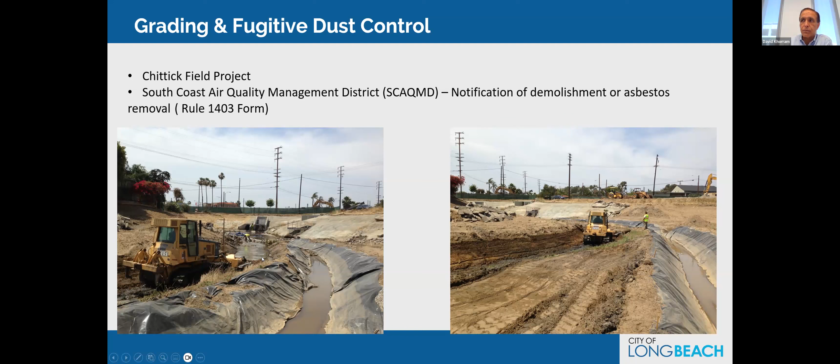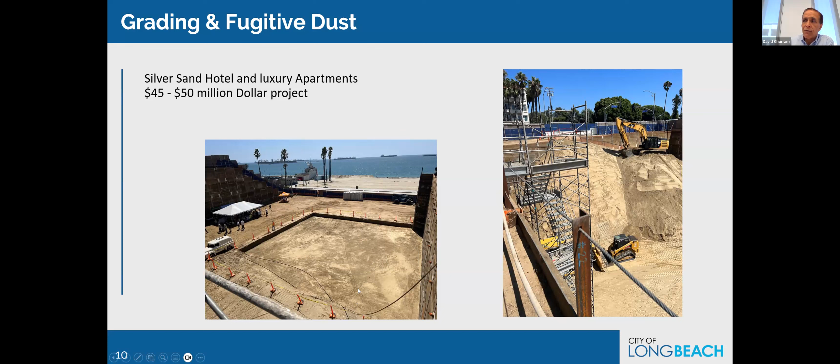I briefly mentioned oil wells and the proximity of construction to oil wells. City of Long Beach still has a lot of active oil producing wells, but more and more these oil wells are drying out, and when they dry out, developers find this very precious piece of land that they want to build on in Long Beach.

But back to the fugitive dust—at these sites a lot of materials come out of these wells, sometimes contaminated, sometimes clean. Concrete plugs have to go in, and it takes place sometimes near PCH.

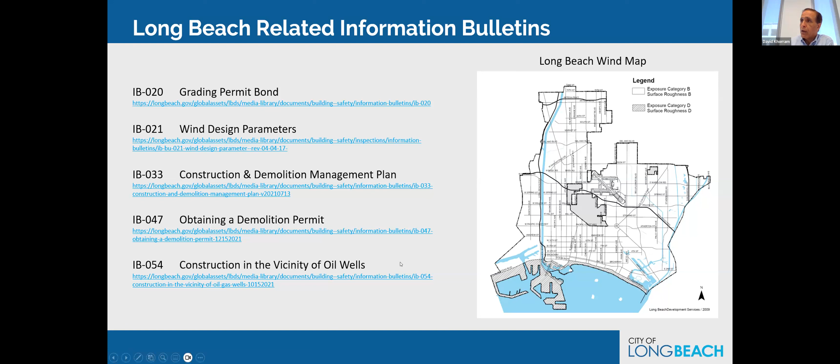That will finish my presentation, and if there's any question, I'll be glad to entertain.

Thank you so much, David. That was an exciting presentation, a complexity of getting permits within the City of Long Beach. And I'm sure within any city, but City of Long Beach, being an oceanfront city with ports and airports and everything, is probably much more involved than any other regular standard city. Any questions for David?

Any question? No question, and we are just 4 minutes to noon time, almost done.

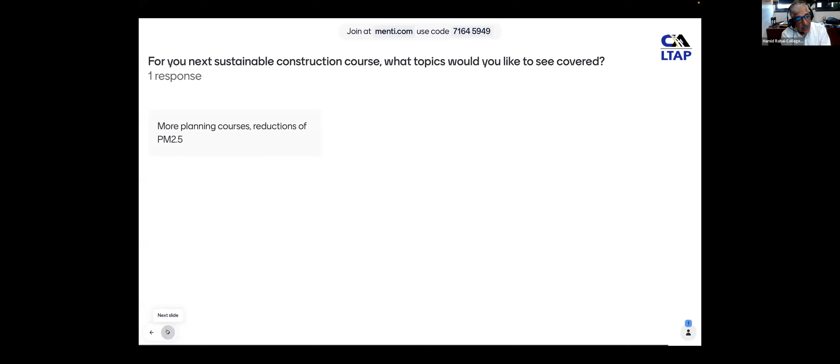We talk about structural health monitoring that we are planning to introduce, which is very new, and I don't think anybody has offered this course. It's a new way of looking at and maintaining or inspecting constructions.

And I'm hoping that would be the case. And I see that PM mitigation, definitely we have a module within the environmental impact of construction on emissions and mitigations that we will be offering as part of that course, definitely in the works, and hopefully in the near future we will have that one.

It sounds like PM 2.5 would be a good addition too. Yes.